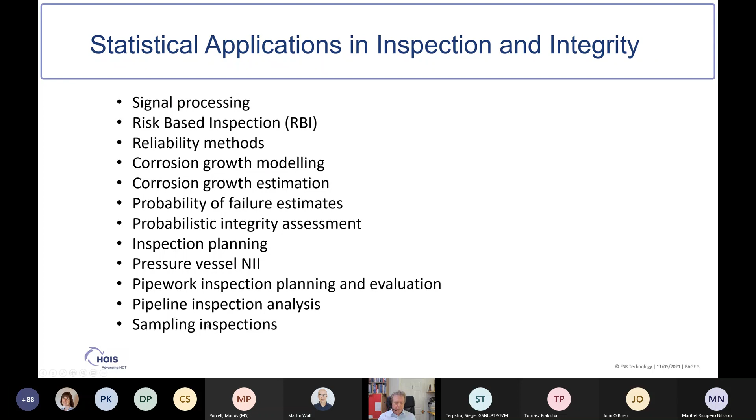What I'm really focusing on today is sampling inspections, where essentially what you're trying to do is deal with situations where there's some benefit to a partial coverage inspection. That might be driven by a reduction in time and cost, or in some cases partial coverage may be the only option where you simply can't get to certain parts of a system.

It's also worth saying that although there's growing interest in partial coverage inspection and use of statistics in that context, the approach is not something new. Piping inspection has historically been based on very small coverage throughout a system. Things like storage tank wall inspections have also had very low coverage typically. Ship hull inspections are another good example—it's been around a long time with quite low coverage.

Even though using those methods there wasn't any formal statistical analysis, there was the implicit assumption that the data collected would be indicative of the condition overall. But advances in inspection technology, which give you large quantitative data sets, and statistical methods have driven application of formal statistical methods to support that sampling.

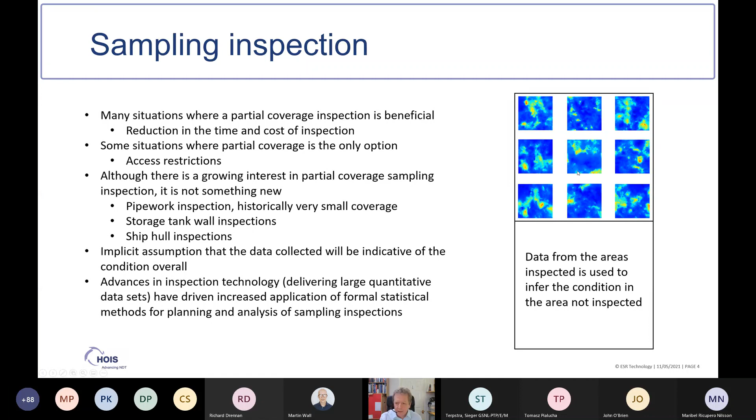So really trying to understand what is happening in the areas you haven't inspected—you take some sample coverage and use the data from that sample coverage to make estimates for the area not inspected.

So the main principle, or your basic assumption, is that the corrosion present follows some sort of statistical distribution whose key characteristics can be described by a small number of parameters. That requirement, as it turns out, is more often than not in place for typical in-service damage. And if you think about it, it's not entirely surprising, because corrosion is a natural process, and like many other natural processes, it often conforms to one of a small number of distribution types which are typically associated with natural phenomena.

We're talking about a very wide range of things there, like what's the amount of rainfall, for instance, through to chemical reaction rates. These things are all typically associated with some sort of statistical behavior and regular statistical behavior.

So the basic approach is to sample, as in measure, the variable of interest. In the case of inspection, when you look at corrosion, we're talking typically about wall thickness or depth measurements, and those measurements are taken over defined areas, and we would typically be aiming to achieve a certain coverage or total number of locations.

Then with that data, we identify, if we can, the applicable statistical distribution, and we establish the parameters for that distribution by distribution fitting, and then we use those parameters to make estimates. In our case, often those estimates will be around minimum thickness.

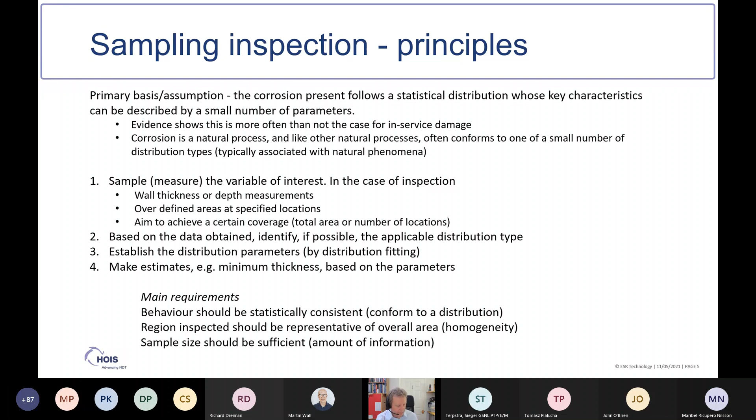So the main requirements to apply it are that the behavior should be statistically consistent and conform to a distribution. The region inspected should be representative of the overall area, so you need some level of homogeneity, and the sample size should be sufficient, so you need to have a sufficient amount of information.

Looking at how inspection technology has changed the approach to statistical analysis, one of the big changes over the last 20 years really has been the greater access to large volume data sets, typically in the form of corrosion mapping, where you'll be getting tens of thousands or up to tens or hundreds of millions of individual measurement points within an inspection.

That gives you a basis for doing much more detailed statistical analysis. The basis for much of that analysis, and this was all covered in the HOIS recommended practice for statistical analysis, is essentially developing wall thickness distributions, where this is shown as a cumulative distribution, and you're plotting the proportion of area below a certain thickness.

So you can see here the majority of the material is this blue color, which occupies the upper - bear in mind this is a log scale - that's sort of around the 25% level.

Most of this material, approximately 75% of it, doesn't have any corrosion, and that's represented by this part of the curve. Then you get this transition to the tail, which represents the corrosion, and this is the part of the curve that you are interested in.

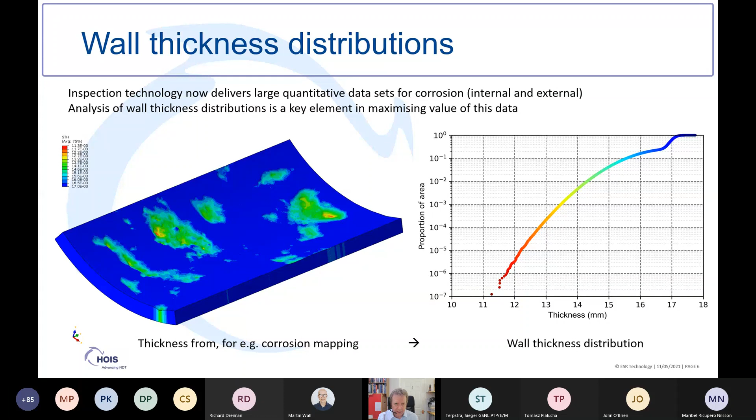So that's really the basis for what corrosion mapping type data, or other quantitative data like laser scans for external corrosion, provides you. The wall thickness distributions give you a useful visualization of the characteristics of corrosion over and above what you would get from your typical colorgraphic corrosion map.

I mean, obviously the corrosion map tells you a lot about the nature of the corrosion and so on, but it doesn't tell the whole story when it comes to things like, well, what is the proportion of area affected by corrosion? The wall thickness distribution, where you get this transition point, very clearly indicates what proportion of area is affected by corrosion, and in this particular case, that transition occurs at about 10% of the area, so 10 to the minus 1.

It also tells you about the nature of the corrosion - the tail behavior, the shape of that tells you something about the kind of distribution that's active. It can also tell you about the nature of how that corrosion has grown, in terms of whether the areas which are deepest to start with continue to grow at the highest rate, and so on.

Another piece of information that's useful is it tells you about the variability in the as-built thickness. So if you didn't have any corrosion, typically it follows a normal distribution, which would be indicated by this red curve, and the width of that tells you about the sort of as-built variability or variation in thickness. Then finally, from our point of view, in terms of using that data, the distribution associated with the tail provides the basis for making estimates for the areas not inspected.

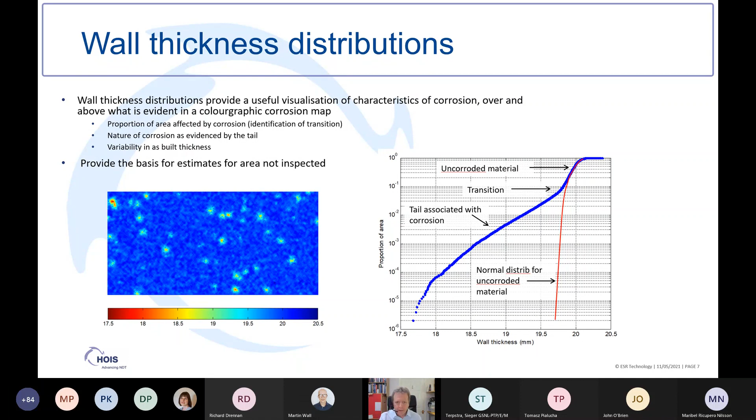So just briefly how that's typically done, and this is an example from the recommended practice training notes from the HOIS document. Essentially this is data which follows an exponential distribution, so it's linear on this log scale. In order to estimate the minimum thickness overall, we essentially extrapolate down from the level at which we have data, which is 10 to the minus 5.

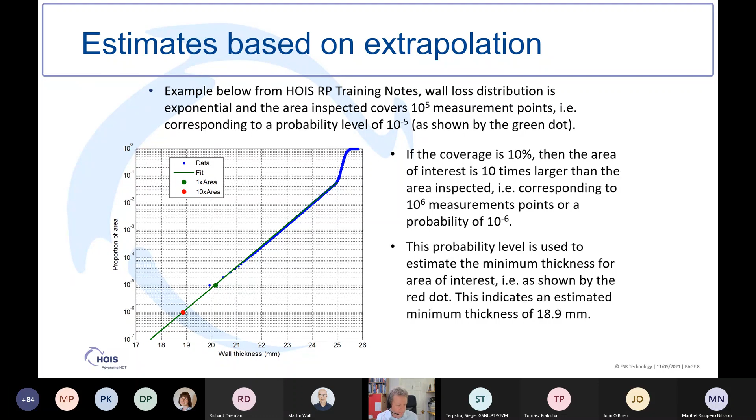And if we had 10% coverage here, effectively we've got 1/10 of the area, so we want to extrapolate by a factor of 10. So we're going to take it down to 10 to the minus 6. In the case of an exponential distribution, it's a fairly simple curve fitting exercise, and you can make an estimate for your most likely minimum for the remaining 90% of the area that we haven't inspected. There's obviously a lot more detail to how you do those calculations than what I'm necessarily showing here, but that's the basic principle of extrapolation.

So that gave you an overview of using wall thickness distributions. Obviously many of you would be more familiar perhaps with extreme value analysis, which has been around for longer and has a stronger theoretical foundation when it comes to corrosion and many other applications. There's been applications since really the 1950s, not just in inspection and integrity, but quite widely outside of that. The main applications for EVA within inspection and integrity really began in the 1990s, mainly with work coming out of Japan, and it's been used on and off since then. So it does predate the use of wall thickness distributions.

Historically, where it's been useful is for data sets which are limited. For example, manual scanning over grids, where you're getting just a set of minimums. It does remain applicable to high volume data sets though - you can still use it with corrosion mapping data, for instance.

And the difference is that rather than using your full data set like with the wall thickness distribution, you're basically using the extremes within blocks of data. So you break your data down into blocks typically, and then take the extremes, which would be either the minimum if you're looking at thickness, or the maximum if you're looking at wall loss. By comparison to using the full distribution, you're effectively using a subset of that, and there are specific distribution types with particular characteristics called extreme value distributions, which would then be applicable to those arising distributions. You then make the estimates by extrapolation of the extreme value distribution.

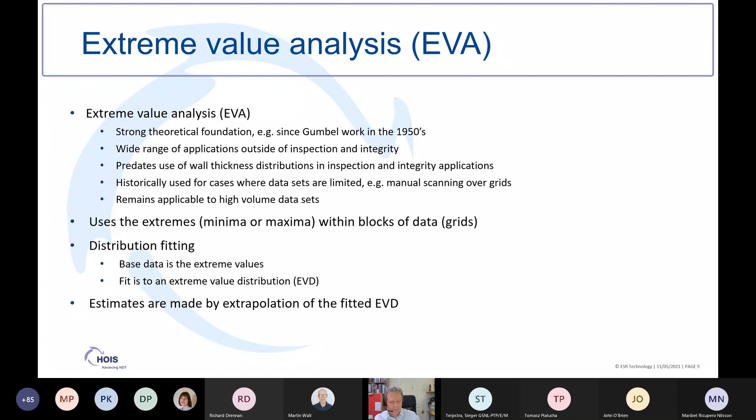So just to compare the two: the wall thickness distribution's ease of use has really been facilitated by advances in inspection technology. You're retaining the full information for the area inspected. That extra data basically allows you to do more comprehensive sensitivity studies. It does reduce the uncertainty typically, as would be linked to the sample size, which can be significant for extreme value analysis. The basis for the approach has been defined in detail in the HOIS recommended practice for statistical analysis, and it's been widely used.

It has a number of other advantages, like giving you a basis for systematic measurement error correction, and the approach has been widely used, particularly for pressure vessel non-intrusive inspection. I think it's generally preferred where the data is available and suitable - and when I say the data is available, you've got reasonably high density corrosion mapping data.

So extreme value analysis obviously has the benefit of greater maturity of application. It's not reliant on high volume data sets, where essentially you're only looking at the extremes, and that does potentially give you some lower cost of inspection. It does lose information because you're only working with the extremes. The distribution can also be contaminated with uncorroded material - so if you've got grids or blocks of data where you don't have any actual corrosion, those can cause issues with the overall distribution that you're fitting. And there is a tendency towards greater uncertainty and sample size sensitivity.

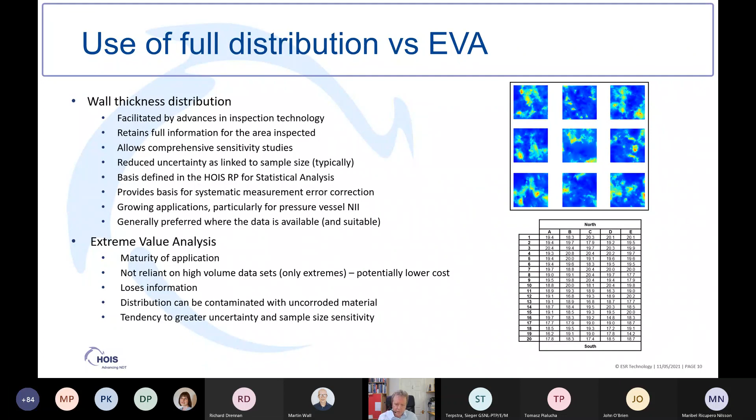So there are, I think, significant benefits to using the full distribution as a basis for analysis, and I would certainly recommend that as a default approach when you have got high volume data available. But it's also important to recognize that there are some exceptions, and the kind of exceptions would be where cost or availability of inspection delivering that high volume data is a constraint. So you may just have manual UT available on site, or you may be working with historical data where you don't have any high volume data.

There are also situations where your high volume data has limited quality and reliability. The surface condition, for instance, might drive high levels of noise. You may have issues with your automated analysis where you're getting a high proportion of spurious data. You may need manual intervention in any case to identify the minima.

But I think some of these issues will start to be negated when we see more machine learning type applications for ultrasonic inspection data, which is still an evolving field—not as far advanced as the kind of applications with visual data that John was talking about.

There may also be cases where you've got complicating factors in the data set. You're relying on manual data analysis, and the inspection equipment might not be configured to output those high volume thickness data sets. I think that's still the case with some heat exchanger tube inspection applications, for instance.

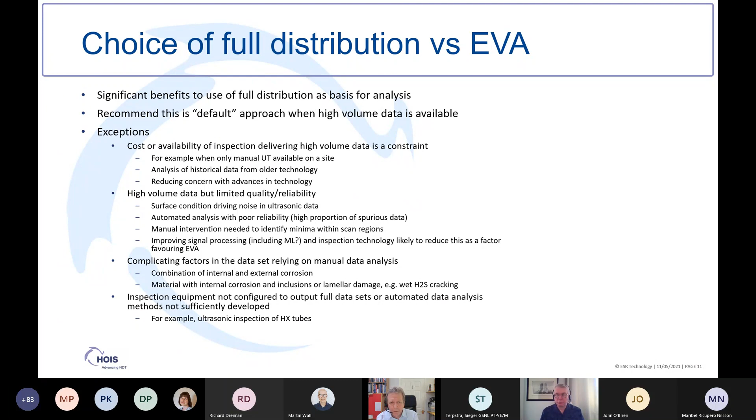With any of these methods, there's a range of factors you should look at affecting the estimates. In terms of uncertainty, does the distribution fit the data you have? How have you fitted the distribution? The mathematics of that is actually quite important—there's different methods of fitting distributions applicable in different cases. The selection can affect the results, as in where you took your data set from, how big your sample size was, variation in terms of whether the corrosion behavior is homogeneous within the areas you selected, and measurement error also plays a role.

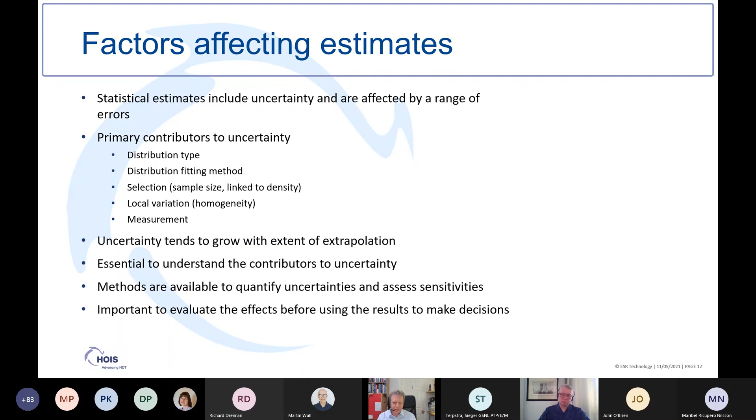It's important to say that the uncertainty tends to grow with the extent of extrapolation, so the lower your coverage is, typically the greater the uncertainty will be—obviously with some caveats around that. But it is important to understand the contributors to uncertainty when you're making these estimates.

So the next couple of slides, I wanted to talk about an important issue that's sometimes overlooked when it comes to statistical analysis of corrosion data, and that's to do with the spatial characteristics. The statistical analysis RP highlights this—the importance of what's referred to as density and homogeneity. Density you can look at from the point of view of either the number of corrosion features per unit area, so dense corrosion would be where you've got a lot of features within a unit area, otherwise it may be sparse where you've got very few. Another way of looking at it is the proportion of area affected by corrosion. If you recall the wall thickness distributions, that gives you the proportion of area affected by corrosion. A low density case would be where that proportion is very low.

Why density is important is it affects the amount of information available in a given sample size, as in the area or number of locations you've actually inspected. A low density means in order to collect the same amount of information, you would typically need bigger coverage. Then another issue is homogeneity, and this really refers to how much the behavior changes over an area.

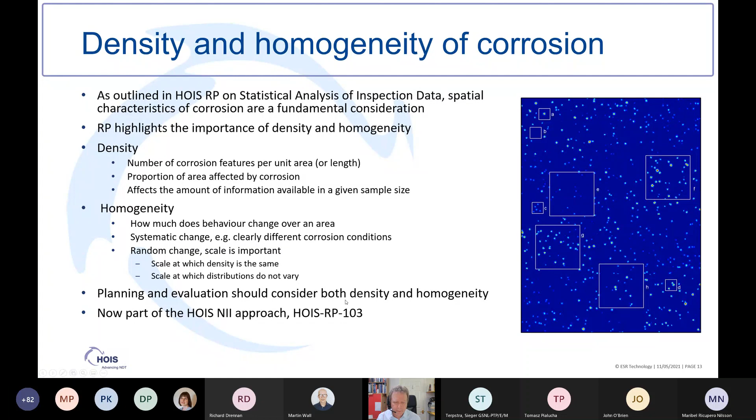It's important that the planning and evaluation actually considers both of these. This is covered in the HOIS recommended practice for non-intrusive inspection, which makes specific reference to density and homogeneity, and also provides guidance on how to assess upfront what your density and homogeneity may be.

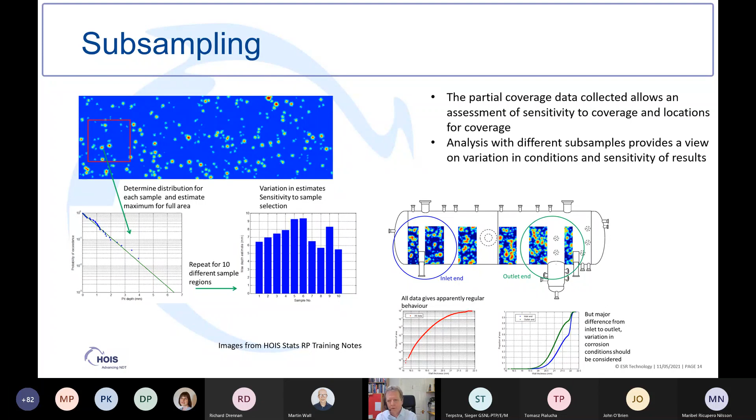I won't spend too long on this slide, but essentially one way of assessing density and homogeneity, and what's the impact on your results, is to use subsampling. These slides are from the training notes for the HOIS recommended practice, which goes through the details of how you would go about taking subsamples to assess sensitivity.

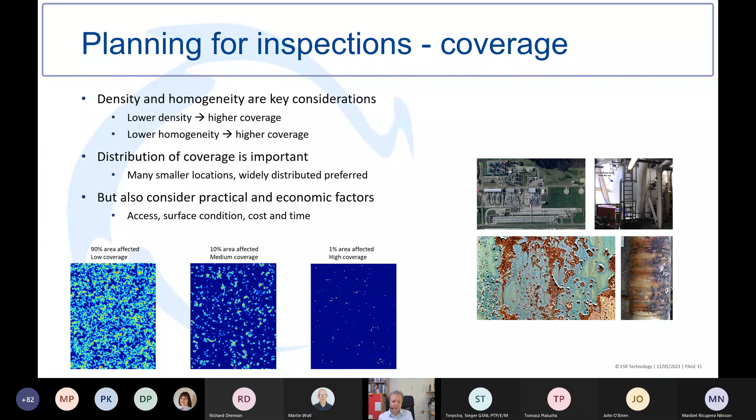The distribution of coverage is also important. Generally, you prefer to have more smaller locations that are widely distributed, not just putting all your coverage in one corner of an item, but distributing it widely across the item. You also have to consider practical and economic factors, things like access - can you actually easily get to certain areas? What's the surface condition like, which for older assets is often a major issue. And what's the cost and time of a given inspection?

The other aspect that should be considered at the planning stage is measurement accuracy, which is an important factor because measurement error adds noise to the data used in the statistical analysis and tends to stretch out the distributions, contributing to uncertainty and making for less reliable estimates. So there is a trade-off between coverage - your sample size - and accuracy, and improving accuracy can support a reduction in coverage. Obviously you still have to appropriately distribute that coverage, and you can do trade-off studies based on simulation at the planning stage.

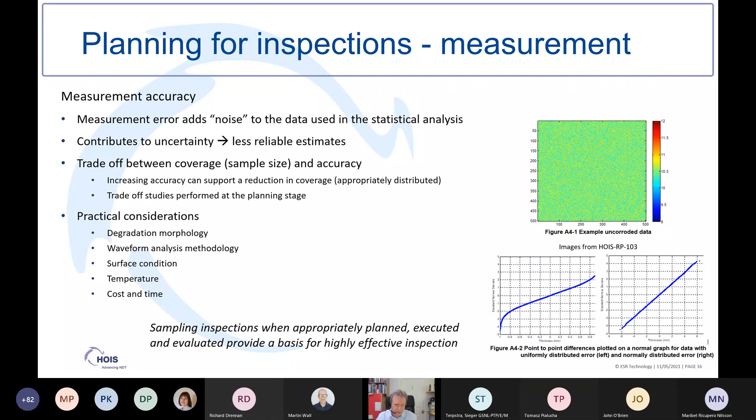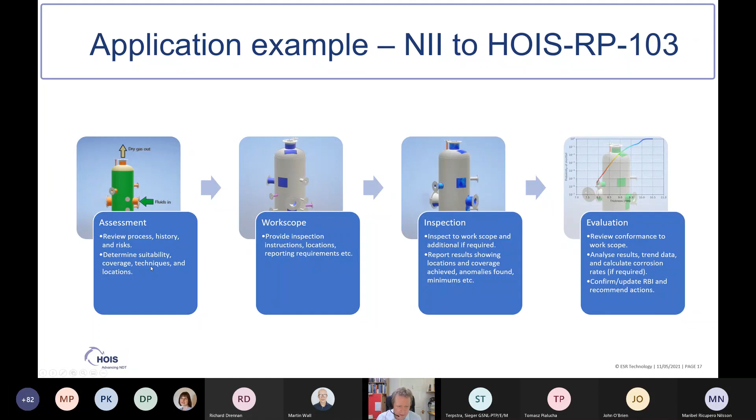Just a few examples of applications. Non-intrusive inspection I mentioned - within HOIS-RP-103 it covers a process for implementation of NII, starting with an assessment phase where you basically look at is NII suitable, and what are the requirements for NII in terms of coverage and so on. Then putting those requirements into a work scope, carrying out the inspection to that work scope, and carrying out the evaluation. So in terms of statistical input, it's at the assessment stage defining what you need for the work scope in terms of coverage, and also at the evaluation stage.

Sampling inspection, as many of you will know, is an important element of both type A and type B strategies within HOIS-RP-103. For the type B strategy, which certainly for upstream is the majority of applications at present, the aim is to specifically permit a partial coverage inspection, and it is explicitly reliant on statistical analysis to make estimates for the area not inspected, which is covered in some detail in the recommended practice.

The approach is to carry out the assessment and planning stage where the coverage and performance requirements have a link back to statistical considerations, carry out the inspection, and then do the evaluation, which looks at conformance plus a statistical analysis estimate element where you're estimating minimums for the uninspected area, and also looking at things like what's the probability that the minimum might be below some limiting condition, and an assessment of measurement performance.

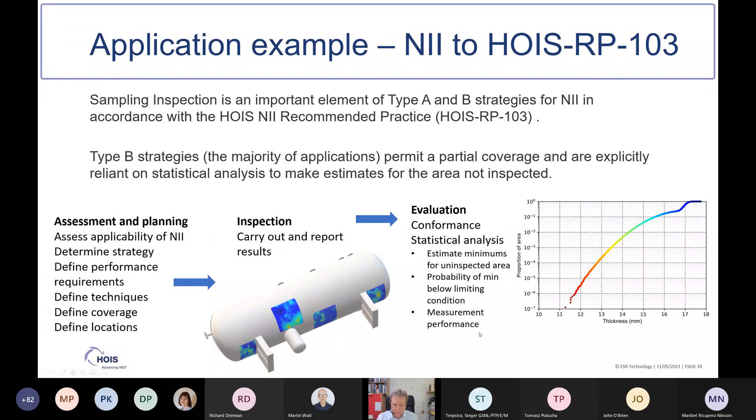So you can have a reliability of your corrosion rates which is very insensitive to your measurement error, your random measurement error.

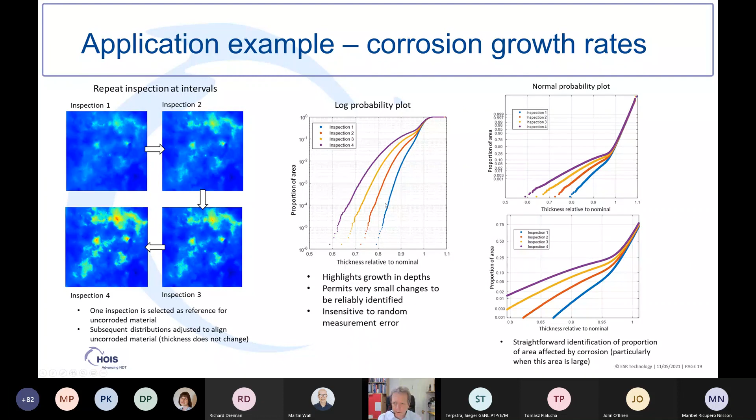I think I'll move on. Just looking at some additional applications and status, additional applications would be things like restricted access inspection, piping inspection, optimization, and those of you familiar with HOIS will be aware of the HOIS guidance for effective pipework inspection from several years ago, which is based on a number of different statistical approaches and methods of visualization.

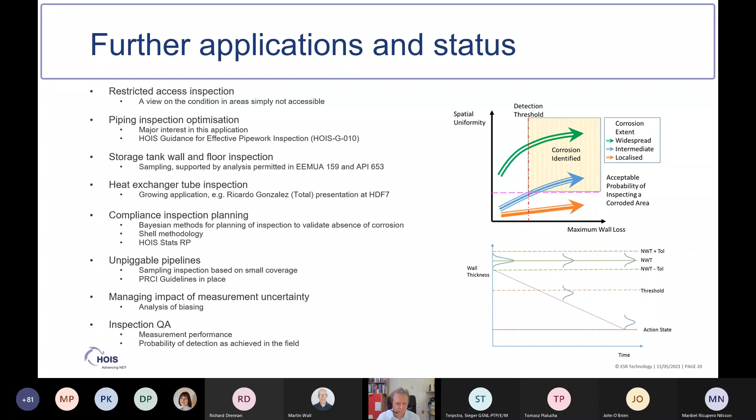Storage tank wall and floor inspection, heat exchanger tube inspection. At the last HOIS digitalization forum, Ricardo Gonzalez included an example of heat exchanger tube inspection, so it is something that's gaining momentum within operators. Compliance inspection, unpiggable pipelines - there's actually some PRCI guidelines in place for using extreme value analysis as a basis for planning and evaluation of unpiggable pipeline inspections.

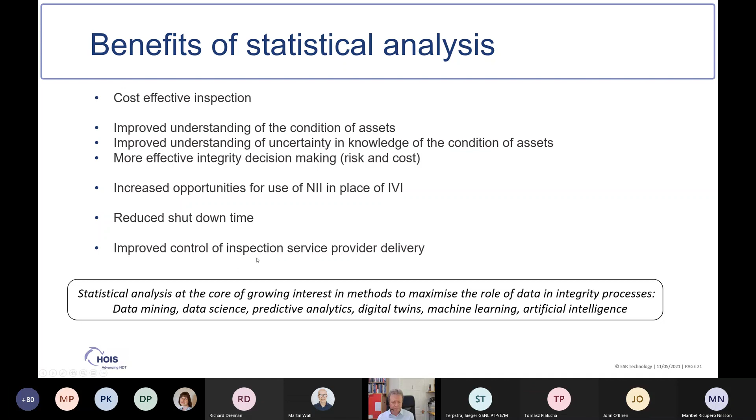You can get increased opportunities for use of NII in place of internal visual inspection, reducing shutdown time, increasing production uptime, and also using this as a basis for QA for control of inspection service provider delivery.

Just in terms of the status and way forward, the methods have been used by innovators and early adopters, both on the operators and service companies, but not yet fully utilized as routine, I think is fair to say. So there is substantial potential for increased application.

And there has been a big increase in interest over the past several years, particularly with things like the HOIS digitalization project and many other initiatives across industry. There's a greater interest in using data better because we're also getting access to much more data.

But even so, there are some restraints to be overcome. One of the big restraints is resistance to change from existing integrity and inspection practice. There's also a question around confidence in new methods, so many people have adopted a wait-and-see position. There's a cost of updating practice, and to some extent, some of these things are reliant on skills which are not currently widely available.

So the solutions to this, I guess, lie in one of them being that integrity and inspection teams should include data science as a discipline, and it's really encouraging to see that starting to happen more widely, not just in the operators but also in service companies. Importantly, also training in methods and applications.

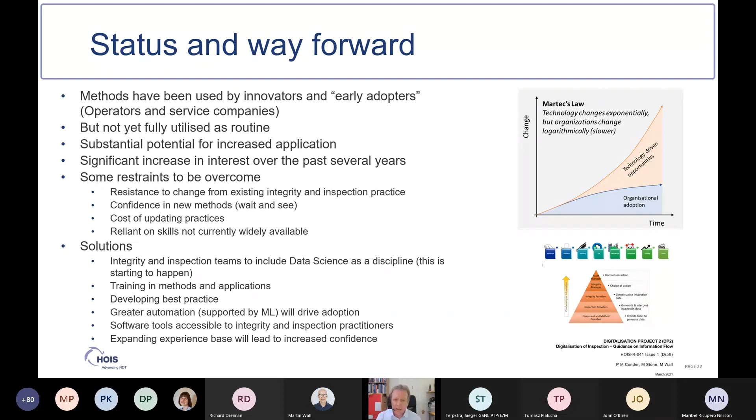I think Sieger mentioned the HOIS guidelines on information flow, and that kind of thing is really essential to greasing the wheels of this process, partly around greater automation, but just making the data easier to use and accessible. That's not a given with many of the processes as they exist now. So there is definite change needed, and guidelines needed around how to make that change.

So just to finish off then, back to where we started around transformation of inspection and integrity, hopefully this presentation, even though it's just focused on the sort of sampling applications, will give you a bit more insight into how some aspects of statistical analysis can help facilitate elements of this transformation.

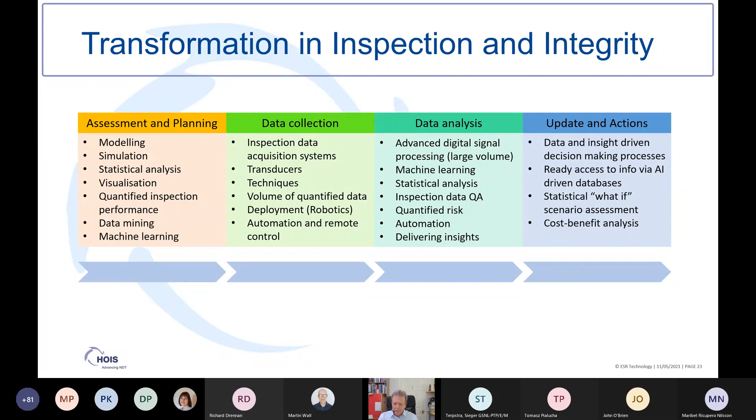So that brings to the end my presentation, and thanks to HOIS members who've contributed to some of the projects we talked about in the presentation, and thanks to everyone for listening today.

Thank you, Mark. Thank you for a very relevant presentation that does take you on from the type of stuff that John was talking about earlier on AI, and to the third talk in our session we'll be having after the tea break. We have time for questions. There's a few questions already in there.

The first one is from Tomasz Pialucha. Tomasz, would you like to ask your question directly?

Yes, I think the question was quite obvious to start with, but Mark gave such an excellent explanation in the second part that I find it outdated already. But here is the question: all this analysis is heavily depending on the distribution type, and the fundamental question which you actually dug very deeply into is how to gain confidence which distribution you are actually going to use for a specific area under inspection. I think this is fundamental work which needs to be done to make sure that the distribution applying this harness of mathematics is actually fitting reality rather than living in the world of fantasy.